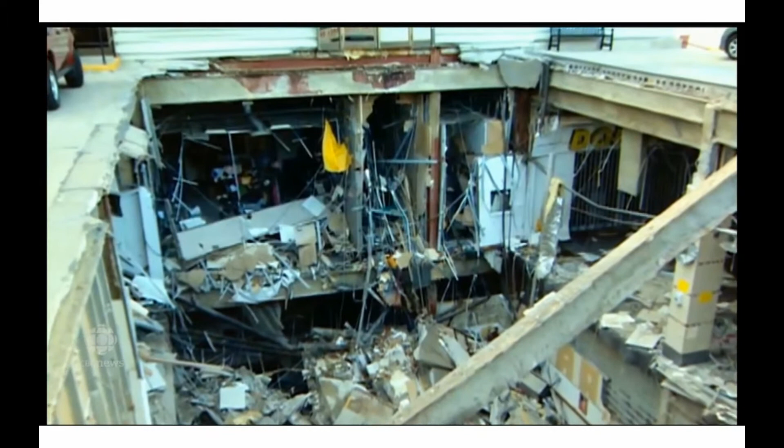There is so little by way of comfort and only some to be found here. A memorial for the victims of a senseless tragedy. One of them was their daughter. Rachel and Rejean Aylwin have yet to find peace. They've come here simply to find answers. Well, I feel it brings back a lot of memories. That's it. It was so sudden, the partial collapse of the city's mall roof two years ago, triggering an exhaustive public inquiry and now a scathing report.

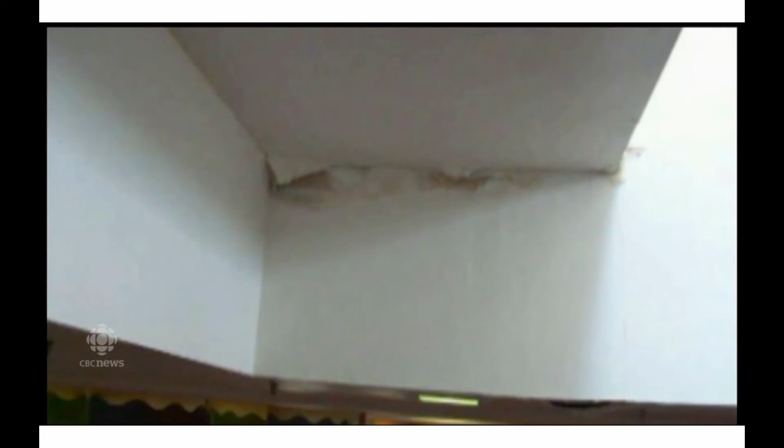A rusted steel beam was the obvious cause of the collapse, but the report found the most damning culprit was the staggering neglect behind it. They ranged from apathy to outright greed, obfuscation, and duplicity. The inquiry revealed shoddy construction meant the mall's roof began leaking as soon as it was built in 1979. That despite repeated complaints and obvious decay, inspectors, public officials and owners, including the most recent owner, Bob Nazarian, ignored calls for proper repairs and did little more than patchwork. No finger to be pointed, especially at the owner.

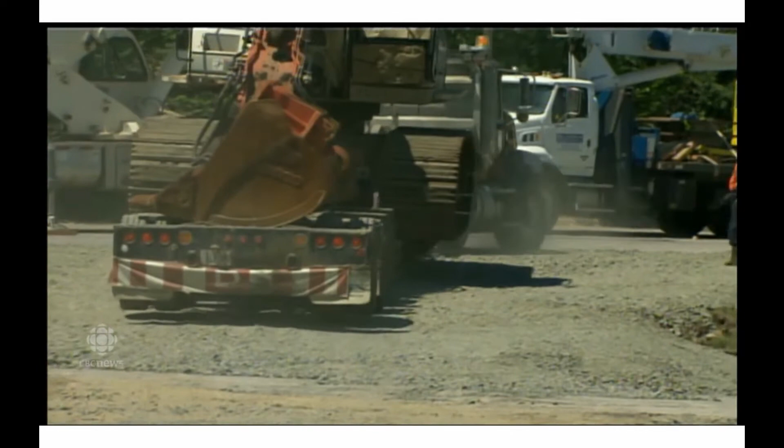The controversial rescue operation that was abruptly called off and then resumed was also examined. The report found 74-year-old Doloris Perizzolo died instantly, but that 37-year-old Lucie Aylwin may have survived for up to 39 hours. Miscommunication between emergency crews and delays in getting the right equipment may have hampered her rescue. It is probable, although by no means certain, that she lived and might have been found alive had the rescue effort been executed more rapidly and more effectively. To the Aylwins, it's one more horrible what if. I hope she didn't suffer for 39 hours. And it doesn't change anything.

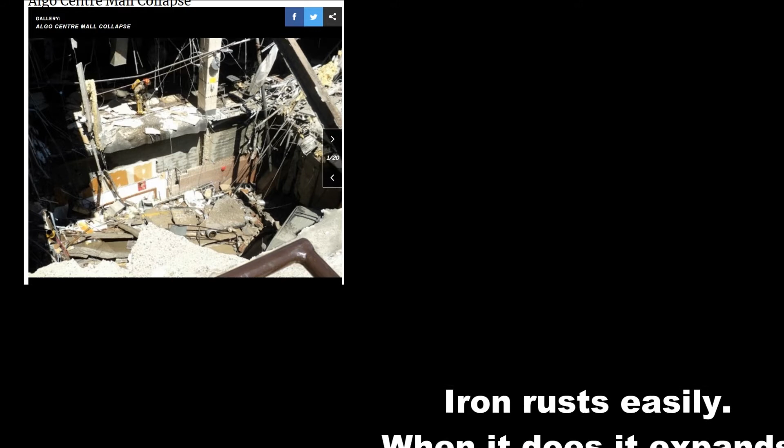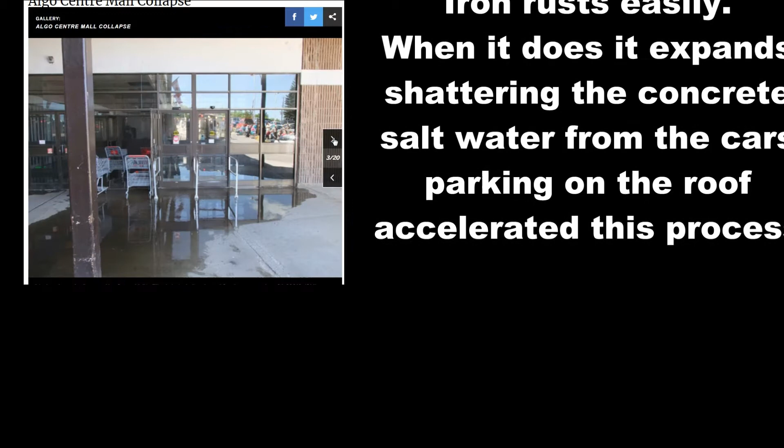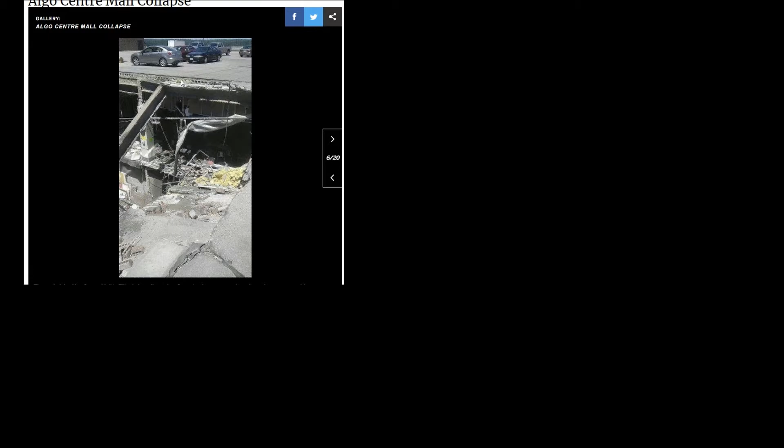The first cause of the collapse is the obvious rust in many of these cases. And it was a real tragedy, and you were only 8 years old, thereabouts, so it's already history to you, but it's quite recent to me. And the main culprit was deciding to save space by putting a parking on the roof, and this led to the corrosion of the building underneath. It was untried for a reason, and the engineer never should have agreed to this design.

It seems so detached from reality, much of what we do in the schoolroom, but the implications of some of our chemical experiments lead to knowledge that should have prevented this building from being built in the first place. And when science and business collide, business tends to have more money and gets its way. This is not the first time this kind of destruction has occurred due to the properties of iron that we don't like, that it rusts.

I'm going to take you on a small tour of the corrosion process that makes iron really rather unsuitable for many of the building processes we have been doing for thousands of years. But the problem has been there's little else we can do. And so this would be a billion-dollar solution, to find a way around using iron inside our buildings to reinforce it. If you don't use rebar, which is called reinforcing bar, inside the concrete, you might as well stack mud. It'll crumble to pieces. So you have to put a steel skeleton inside the concrete.

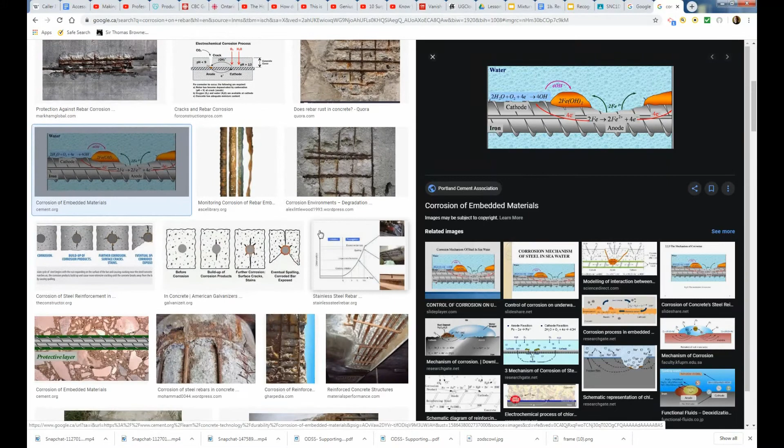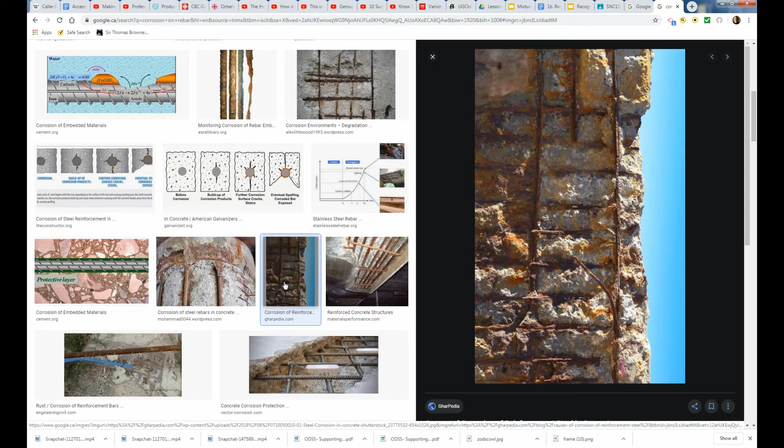This equation showing how the rebar is chemically attacked is something chemical engineers and building engineers would look at to try to solve. And they know the entire process; to eliminate it would save lives and make our buildings last a lot longer. So this would be about grade 12 chemistry if you got that far. But you can see evidence of iron's unsuitability. But the whole thing is, we don't have anything better to reinforce our buildings with. Sure, you could switch to stainless steel and titanium. That would be fantastic. But for a non-chemical reason, the cost makes it impossible to do.

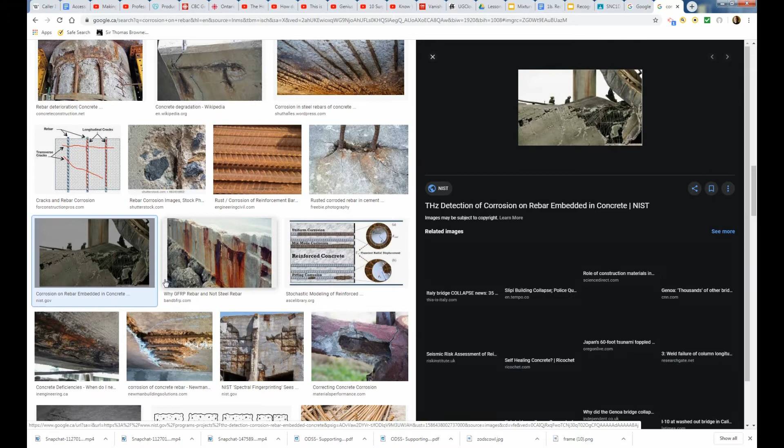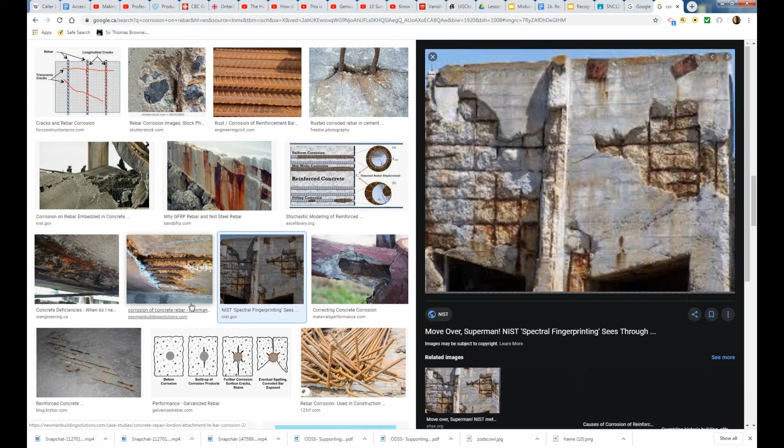So rebar corrosion may not sound very romantic, but people die if it fails in a big way. And you can find this everywhere on the planet. Malls collapsing, buildings collapsing, and there's more to a building's structure than just the rebar, but it is one of the well-known failures in our construction industry, and this is what limits the lifespan of bridges and buildings made with concrete and is a real problem in dams.

Now, this rebar here does not look like iron, does it? This one here says galvanized. And what galvanized means, you've probably heard of galvanized buckets, is you've coated it with zinc. And if you get a nail that's zinc coated, zinc has almost a chrome-like look to it, but it's dull.

You can't put a shine on zinc. So this is a galvanized surface, okay? And different appearances to galvanized. It's a silvery to a bluish coating, okay? Here's an example of a galvanized rebar being tied to a standard iron one, and you can see the galvanized one is working really well. And here's an example of the standard rebar partially coated and a fully galvanized one exposed to the elements.

So why haven't we moved to 100% galvanized rebar? Again, the cost, and you run into another problem. You see here, low-end construction, and the engineers decide this. They wire tie the rebar together. But if you've ever gone by a building that's being assembled, you will often see welders working on the rebar. So in other situations, they may weld the rebar together. And at that point, the zinc is not only useless, it's actually hazardous because you'll burn the zinc coating off when you weld. So the money you spent putting this coating on here will be gone.

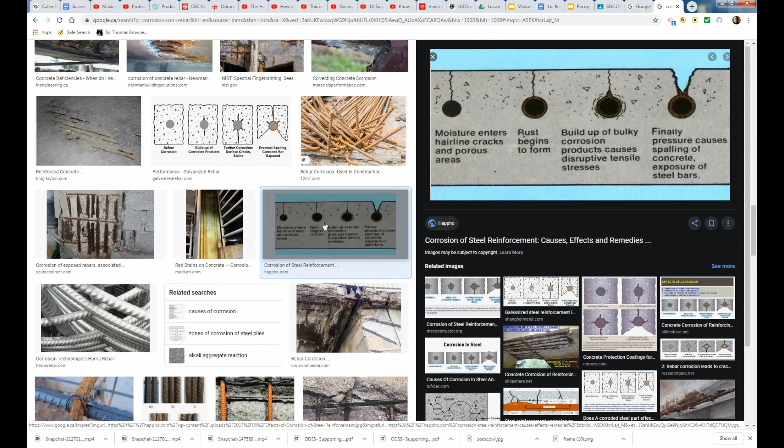I'm going to introduce you to something else here. And you might go, why didn't I just put this as reading? Because sometimes it's just nicer. It would be something closer to what I did in the classroom. If we look up galvanic corrosion, I'm sure you've seen this. And I would like you to read this Wikipedia page. Doesn't mean memorize it, doesn't mean you're going to be studying it, but this is the closest I can bring this stuff real without our classroom. In the classroom, I could show you this stuff. I could pass around things that you could handle. So this is my attempt of replacing the show and tell in the labs, is to kind of tour you through things.

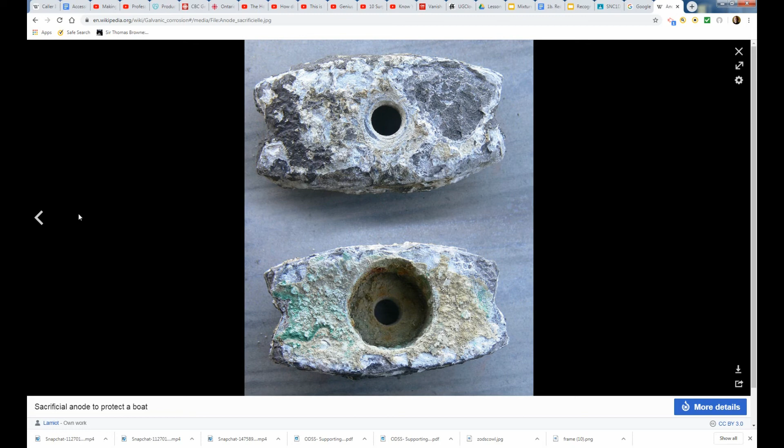And not to be paranoid, but whenever I take my girls, they're older now, but when they were babies and we drove them out to British Columbia, at every hotel that had a wave pool, a slide or something, the first thing I would do is look at the bolts on the base. It's not to be neurotic. It's to be abundance of caution. And the old mall in Orangeville, the original light posts were sticking up on concrete pillars, and the bolts were very rusted. And I tended to avoid parking near those light standards because I figured they'd fall down one day. Well, then a few years ago, they completely replaced those light posts.

If you pay attention, you will probably hear in the media of a building, a slide, a water park, something collapse over the summer, and it's a failure to inspect these bolts. When I've gone to Canada's Wonderland a few times, same thing. I tend to look at the bolts at the base of the towers to go, is anyone inspecting these things and making sure they work?

Now, what's really cool here is this. Here's a little bit of trivia for your parents: read this section on lasagna cell. And you may have seen it in your fridge, you just made no note of it. So anyway, this is an example where we can have a property that we don't desire. Now this is a chemical property of iron I've been covering, and I'm doing it in physical properties because the two kind of merge over a little bit.